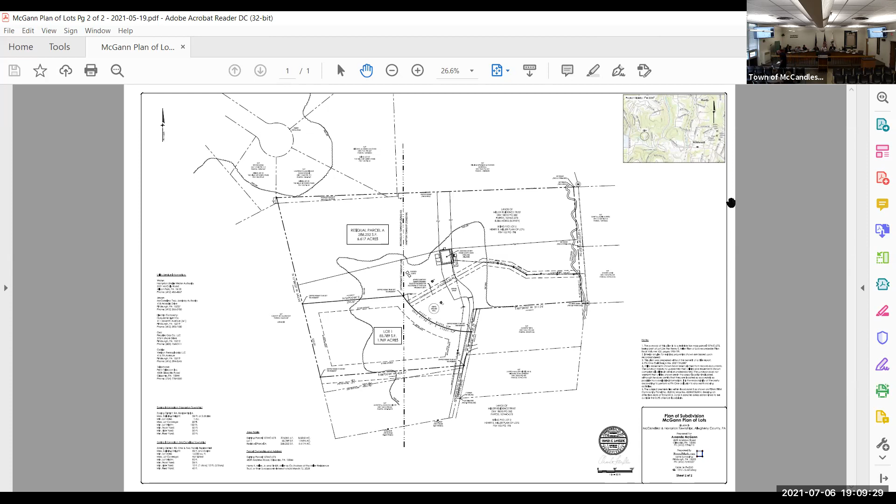All right. Give you a few seconds to get the next item up. And who do we have here? Do we have someone here for the Chesmer consolidation? Aha, there you are, sir. Come on up. The second item is a review and recommendation of the Chesmer consolidation plan. And I'll just give a pretty brief background here. I recall this is one of those bingo lot plans that we've seen before.

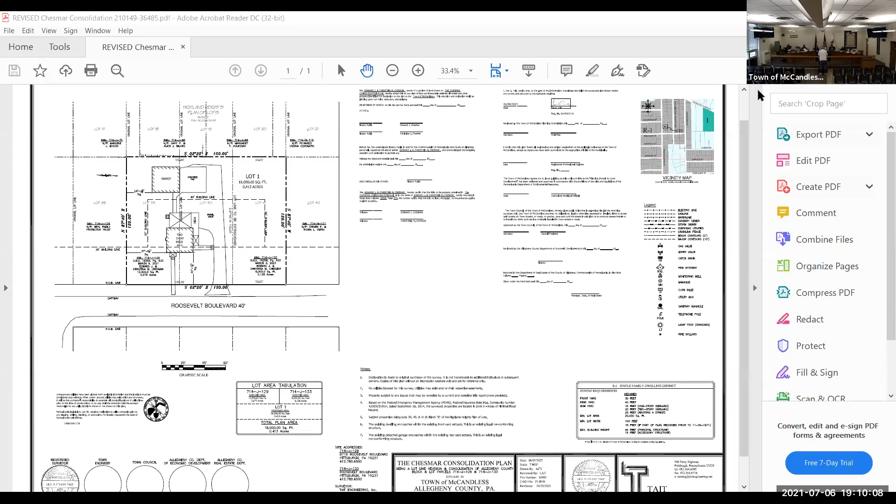Bingo lots. So from what I understand, the applicant came in, wanted to do something on his property that required a building and zoning permit, and discovered at that point his property is actually not one single property. We've seen these before; this is a plan requesting to consolidate all of the lots into one. I can confirm that the engineer's review letter has no further comments. Everything is code compliant at this point. If the applicant has anything else to add, you can do it now, sir.

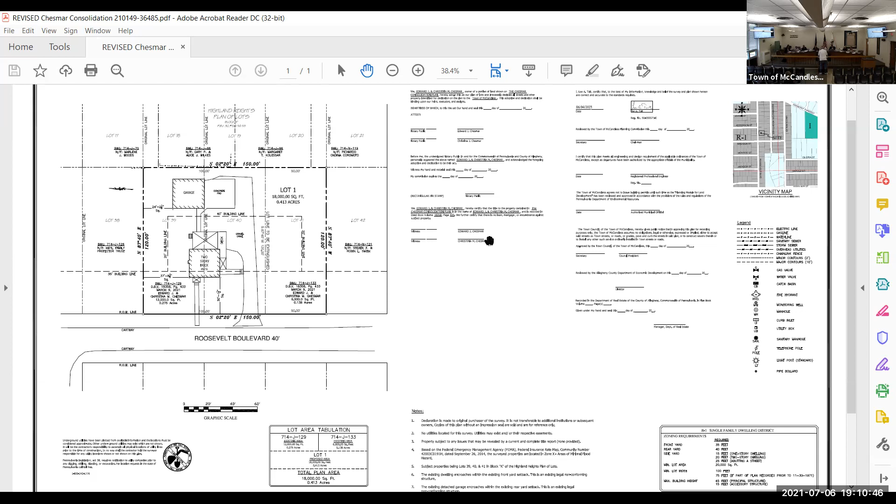No, this is uncharted waters for me, but I've learned a lot in a short period of time. I got the letter from Gateway, and I'm pleased with what I read here, I guess. Okay, you've owned all three lots right now? Yes, sir, I've owned them for a very long time. The one house we bought in 1981, and I bought the extra lot 9 years later. Okay.

Any comments? Greg? No, I don't have. Kim, anything on your end? No. Okay. All right, could I have a motion then to recommend approval? I'll motion to recommend the town council approve the lot consolidation application for the Chesmer consolidation plan. All in favor? Aye.

Okay, that's it. If I may ask, what's the next step? Yeah, so most likely you will be on the July 26th town council agenda. I believe we've already gotten the review letter back from the county, which is the last step before we put you on a town council agenda, and everything was okay on that front as well. So that will be the fourth Monday of the month. Meetings start at 7:30. Usually you come up towards the end of the agenda when it's a new agenda item. Okay. That's July 26th?

Yep. Oh, maybe that'll be lucky. That's my wife's birthday. Hey, that'll be a good birthday present for her. Good. Thank you for your time. Okay, thank you.

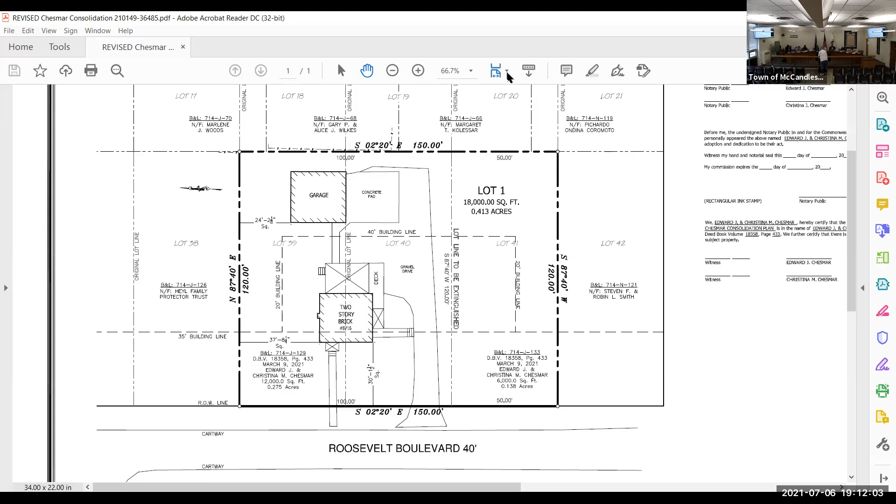All right. Next item on the agenda is 2020 Vision Holdings parking lot renovation, 8301 Perry Highway. I have a rendered plan. Would you like me to set it up for visual? Oh, you know what? Right now this AV system is all new. So I can pull it up if it was part of the latest submission. It was not. Okay. It would just be a hard copy. Yeah, let's do that for now, unless you can connect your computer to Wi-Fi.

So we have to make a motion to accept the application. Yeah, for those land development ones, we could do that, so that way it's on the clock. Okay, could we have a motion to accept the application for review? This is just while you guys are setting up. This is an administrative thing. This is something new, but it gets us on the clock. I move to accept the application for review. I'm not sure what that is.

So technically per our code, I think because that portion of the code was created before we had a planning person, to officially get land development applications on the clock for the state's required review period, we have to accept them formally at the planning commission. Is there a second? I'll second. All in favor? Aye. Okay. All right, now that that piece of administrative review is out of the way,

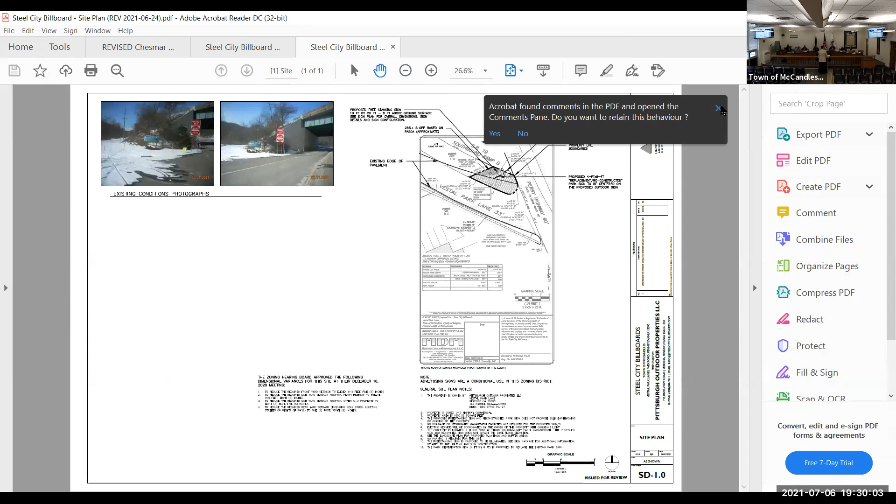And just while I am pulling this up for the Zoom, for some background, we have certainly discussed this plan before in general. This is the conditional use application that was discussed, I think, for a couple months prior. This is the land development side of that. So essentially, the conditional use is pending before town council. They had requested to bump the public hearing date for the conditional use back so that it could be considered in tandem with the land development application. This is that piece of this whole approval process.

As a refresher, it is a static billboard as I've been defining it, which essentially means it's not something that's electronic, it's not digital, the copy doesn't change. It's just whatever they put up at any given time. Specifically in our conditional use code, it does limit these types of billboards to being a static billboard, which is why that's been mentioned on the agendas and material related to it. I don't think I have anything to add since we've talked about this before. Just review with us how big this billboard is.

Sure. First of all, my name is Brian Almeida with the firm of Farringer McCarty Gray, representing the applicant, Pittsburgh Outdoor Properties LLC. They're also in the audience if you have any direct questions of them. Oh, you know what? I'm sorry, Brian. Before we move on, because this is the first time we've seen the land development portion of this application, we do want to do that administrative motion before we proceed. Could we have a motion to accept the application for review? Make a motion to accept the application for review. I'll second. All in favor? All right. Yes.

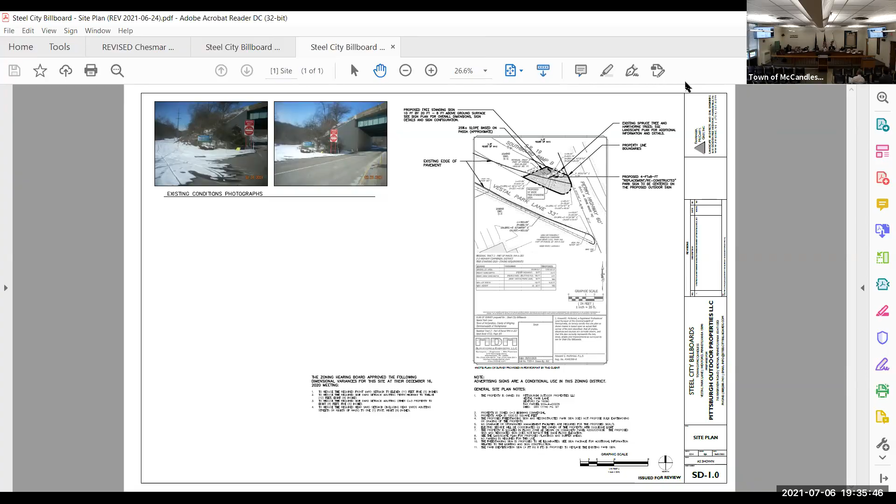The next item on the agenda is the McCandless Square Phase 2 retail. The first thing we have to do is have a motion to accept the application for review. Could we have that motion, please? I'll move to accept it for review. Is there a second? Second. All in favor? Aye. Okay. Who will be presenting this? All right. Jerry, I'm guessing that's you. We haven't actually met in person yet. It's been a while. All right, and I know we've got Kevin Doherty on the microphone here. We also have Todd Pfeiffer as well from MSRP LLC. Unless you want to be standing up, you can sit.

All right, so I sent Kevin a mic and camera request. Kevin, if you're not able to mute and unmute yourself, I'll fix that if that's a problem. But otherwise, just wave, I suppose, if you get muted and don't want to be. So Kevin is joining us from North Carolina, I think. One of the wonderful things of this hybrid format is we can have a couple different people here and a couple different people somewhere else.

So just as a quick introduction, I understand that this project predates me by a bit, at least the phase 1 and the concept plan of this development. But for those who aren't familiar with McCandless Square, it is, I believe, the former Trader Horn site, just a little bit down the road. Phase 1 was the Continental Senior Living Facility, which is nearing completion, I believe. Phase 2 is the retail portion, which is the northernmost portion of the property. This has survived so far, survived COVID. They're back at it and ready to present the latest that they've got. Did I get that right? That's it. Yep.

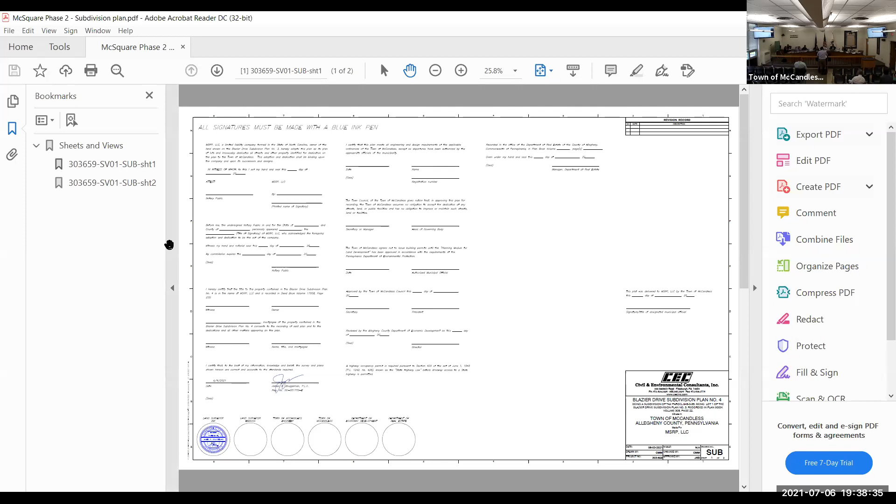Okay, what we want? That's it.

All right. So my name's Jerry Klodowski. I'm with Civil and Environmental Consultants. We are the consulting engineers for the project for MSRP LLC. The subdivision plan you see here, originally the site was about 24 acres. When Continental came through and did their subdivision plan, they consolidated the 3 lots that were there. We re-subdivided into 3 additional lots.

This subdivision actually takes lot 1 and subdivides it into 3 separate lots. The idea behind that is to keep a portion of it for the retail center, and then there's also going to be a sale for a daycare portion of it, and then potentially a future townhome portion, which is not part of the application. So that was the whole point of subdividing the property.

There were some comments on the Gateway letter regarding setbacks. The only setbacks we showed are along Blazier Drive and the exterior property lines. As part of the master plan approval, we are not required to provide setbacks on interior lot lines, so we do not show any setbacks on those lot lines. We do show that there was a sidewalk missing along Blazier Drive. That has been shown on the revised subdivision plan, so that'll appear when we resubmit it.

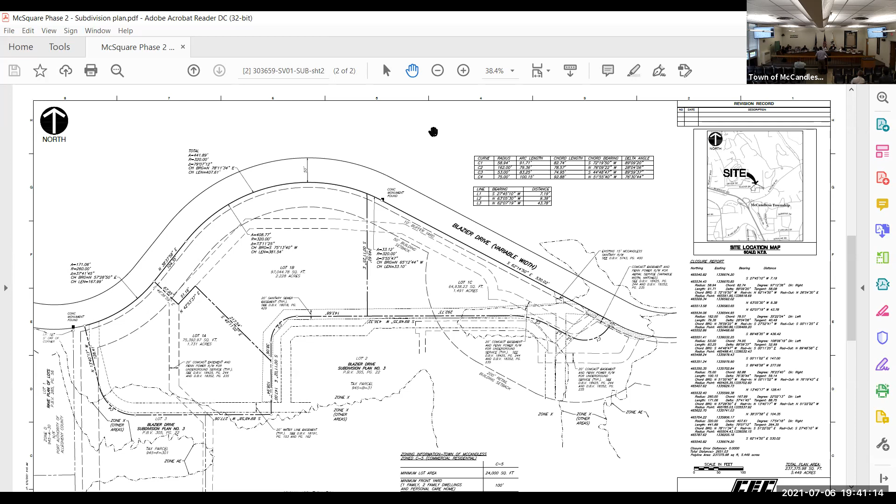That's a specific requirement of the stormwater ordinance, Jerry. That's why that was in there. So if it's covered in reciprocal easements, that'll be fine. Okay. Now we can go to the, I'm sorry. That's it for the subdivision, yeah. RJ? On the subdivision plan, no, I don't have any comments at this time. Everything's within Gateway's comment letter. Any comments by the planning commission members? Dan? No. John? Greg? No. Yep.

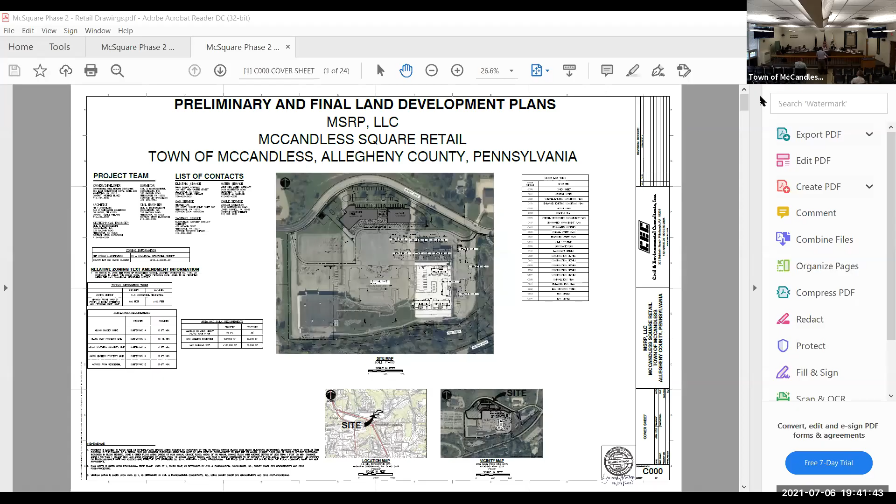Okay, all right. Now on to land development. There we go. All right, let's see here. I've got LD submission, which does not look like a large enough file. Aha, here we go. Retail drawings. All right, you just tell me what page you want us to be on. You can go to C200. C200. We want to see 300. There you go. Oh, this is what you wanted? Yeah, you can keep that one up for now.

Okay. So what I want to do is just go through what we're doing with the plan, what was done previously, what this project entails. And I think there's probably about 5 comments on the Gateway letter that are significant that we would like to address. A lot of the other ones are just some housekeeping items that we need to clean up in the letter.

So as RJ indicated, this project is a piece of a larger project that came through McCandless in 2019. The overall project is approximately 24 acres. And when we came in initially with the assisted living and the cottage homes, we developed a master plan that incorporated this retail portion of the project. So now that the assisted living and the cottage homes are underway, MSRP LLC decided it's time to move into this retail portion of it.

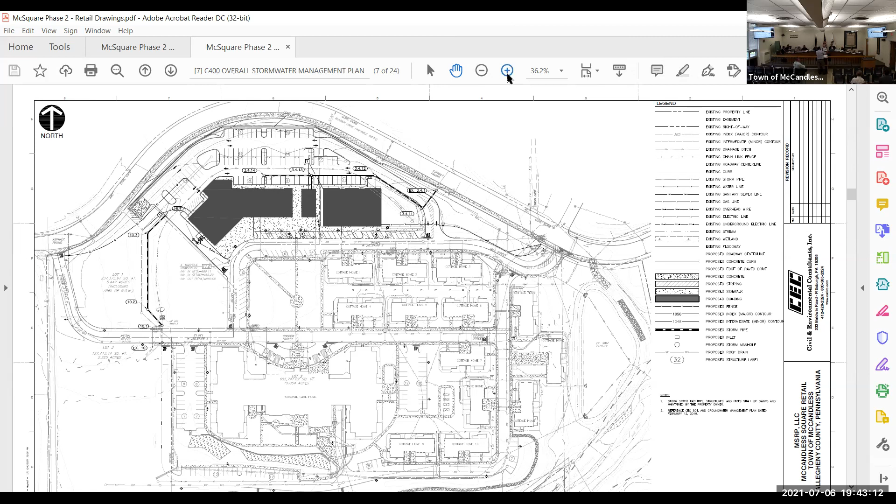So what we have is approximately 28,300 square feet of retail/commercial use. The building that is on the right-hand side is intended to be a 10,000 square foot daycare center. All of the daycare tenants will basically show up early in the morning, loop through the parking lot, drop off, and then leave the development. The parking for that can be handled by the parking along Mill Street in front of the buildings, and then the parking lot that we have behind the building itself.

The other larger L-shaped building is a 16,500 square foot retail and restaurant building. There's going to be a brew pub type establishment in there and other food amenities for the residents of this whole development. All of the utilities are existing. There's water lines out front along Mill Street that are going to connect up to these buildings. They've all been sized and developed to incorporate this into the project. Sanitary sewer is also out in Mill Street.

The only utilities that we're really adding is that run of storm sewer that runs along the back of the building to the right side, and then there's a run that goes through the left side. All of the stormwater was previously handled with the original development, and we submitted a letter that basically justifies that we have less impervious area than what we had originally planned. Therefore, the stormwater still is in compliance with the McCandless ordinance.

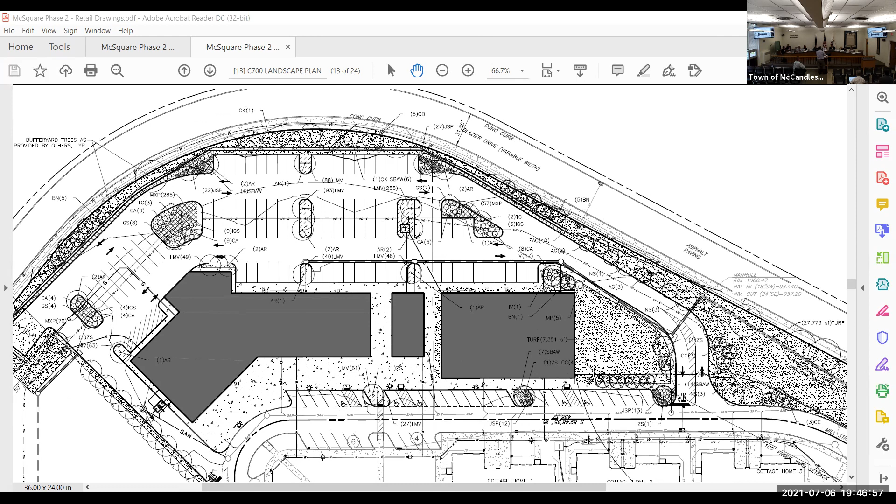If you don't mind, I'm just gonna pull up the rendering image because I think that illustrates it pretty well. Where's your dumpster? It's almost off the page there to the left. Oh, all the way to the top left? Yeah, side left. Right there, yeah.

I think my Adobe Acrobat is a little upset that I've tried to pull up so many large plans. Let me see, maybe the arch renderings one is the one that I want here. Aha, all right.

That gives you a better idea of what they would be doing with the patio area. And it sort of follows the same color scheme as the existing assisted living and cottage homes with the white siding. And then here's... Oh, you want to go back to that? Sure. That's the elevation that is facing the large building. Yes. Okay.

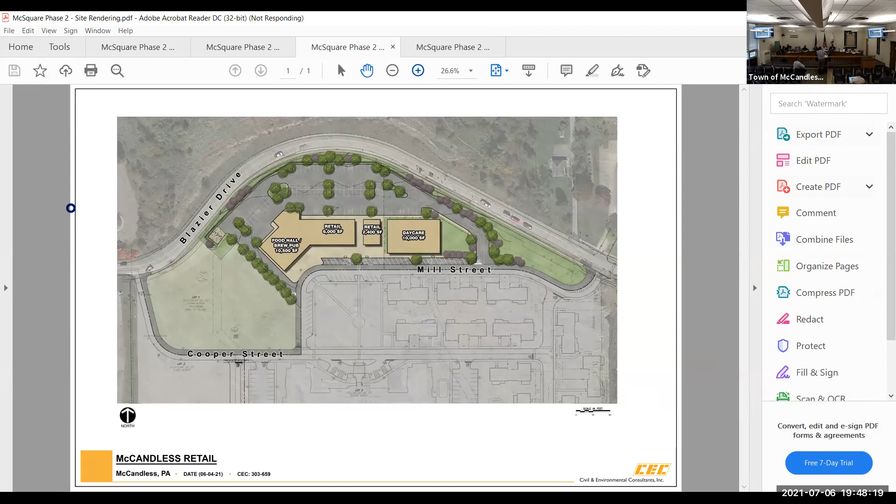Where will people be entering these retail from? They'll have double frontages, so they'll be able to enter from either side. Because I see parking on what I call the backside toward Blazier Drive. Right. And wouldn't that be the primary place people would enter from? Not necessarily. If folks from the assisted living or the cottages choose to visit this, chances are they're going to walk up through the front. Okay. But you're right, most people that are going to come in here to park will most likely park behind the building and enter that way.

But there are about 40 parking spaces that have been designated for this use along Mill Street there in the front. So for the assisted living and the cottage homes, there's ample parking elsewhere excluding these spaces. So these spaces can be used solely for this development.

Where's the main entrance for the daycare? Is that in off of Mill Street? We're not sure where it's going to be yet, but we believe it's going to be along the west face, right along that side.

And from what I understand, and Kevin, you can interrupt me, we believe that because of security protocols with the daycare, they will actually bring an employee outside to meet the child so that there's no additional clearances that parents would need to enter the facility. So a daycare worker will come out, pick up the child, take them back into the daycare. That's correct, Jerry. So it sort of alleviates the idea that somebody's going to be parking there long term or even short term for that matter. They're basically stopping, dropping off, and then going.

How many kids will be involved in the daycare? I believe it's 180 to 200, Ted. Okay.

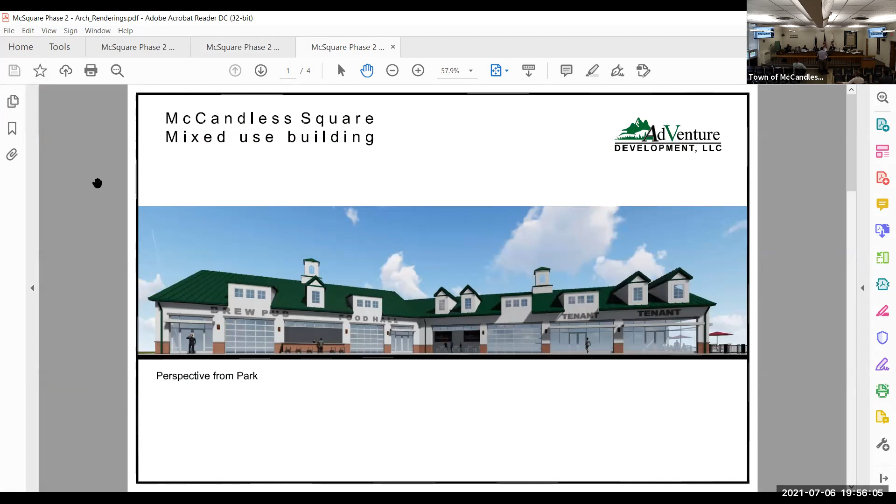I have a couple of questions, comments, I suppose. I'm concerned about the view or the elevation from Blazier. If I'm looking at the right south elevation, I think that's quite an attractive look. But people traveling on Blazier are going to get a less attractive look. They're going to see essentially the back of the building. It appears to me as the back of the building. Is there any way that can be improved?

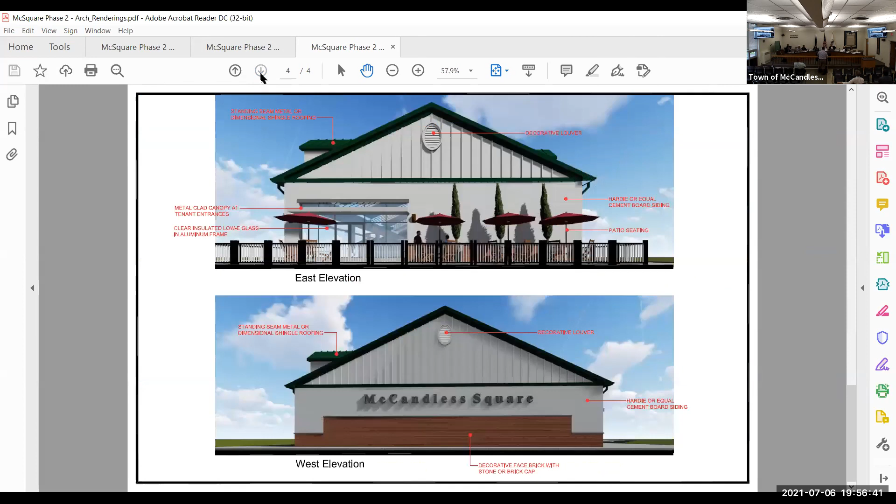I don't want to repeat what I call the McCandless Crossing blank wall look that you get going up and down McKnight. So is there some way aesthetically to improve the back of this, which is what everybody's going to see that travels along Blazier, so that they get a better view other than a large blank wall, trash receptacle, and, in my view, a much blanker, less attractive look.

Well, you're talking about dumpster enclosures and trash operations; it's difficult to make that look attractive in any setting. I will say that at McCandless Crossing, we did use similar dormers and tried to paint storm piping and utility lines in a color that blended into the walls, and tried, frankly, to hide some of it with some landscaping.

These are architectural renderings and don't reflect what landscaping there might be near the building that hopefully can send your eye towards that, versus light poles that might have our banners and things of that nature that would hopefully draw your attention as opposed to the service areas. Keep in mind, those doors that are shown there, they're glass doors. They're not just metal doors. I was looking at it quickly, and that's the feel I got too, that they were going to be metal doors, but they are going to be glass.

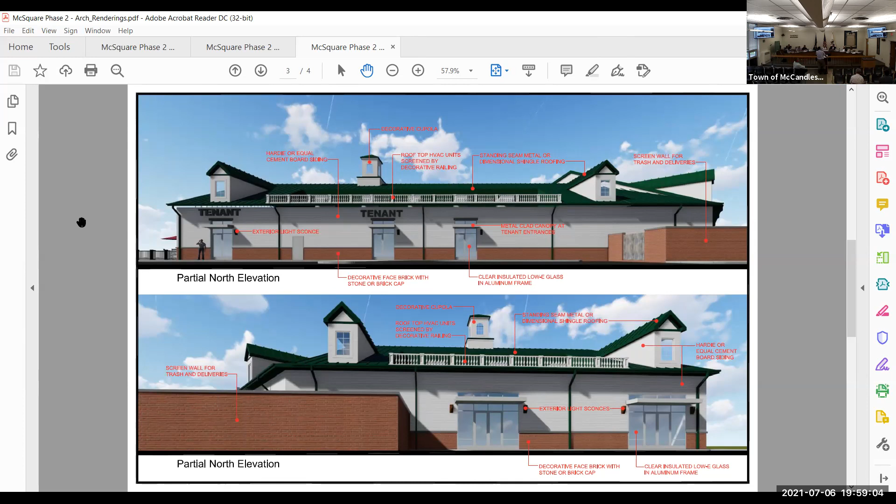RJ, the back one. Is that the one? Yeah, that's the front there. So you're referring to the triple window dormers as opposed to just the singles. More of it, and it breaks up the roof line significantly. Jerry, what's the height differential when you're traveling on Blazier Drive versus the finished floor elevation? Yeah, it's significant. It's 15 to 18 feet at the high point. So you're 15 to 18 feet higher on Blazier Drive than this building? Yes. Okay.

Yeah, I certainly understand what you're saying, but we also have to consider where the audience is, and playing to the town green, the center of activity, is something you've got to create synergy around. My hope is that you'll be seeing the roof line and up, but certainly we can look at some dormer additions beyond what's there. We'll certainly take that into account. Thank you. Sure. John?

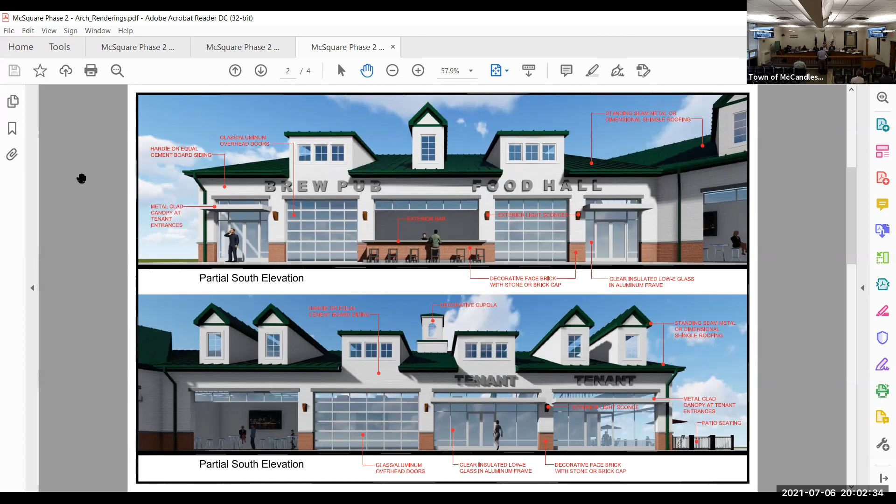Anything else from anybody? Greg? I do have one more. You have a couple. And I'm not sure how this was resolved, RJ, because you and I had some conversation in the last few days. This has to deal with when we were first looking at this property, we had proposed and had given agreement to a path between the large residential building, the 3-story building, and the creek. This was going to be a path for the public to use and part of the overall trail system in and around McCandless that we had proposed in our comprehensive plan. Is that still being planned, and what is the status of it?

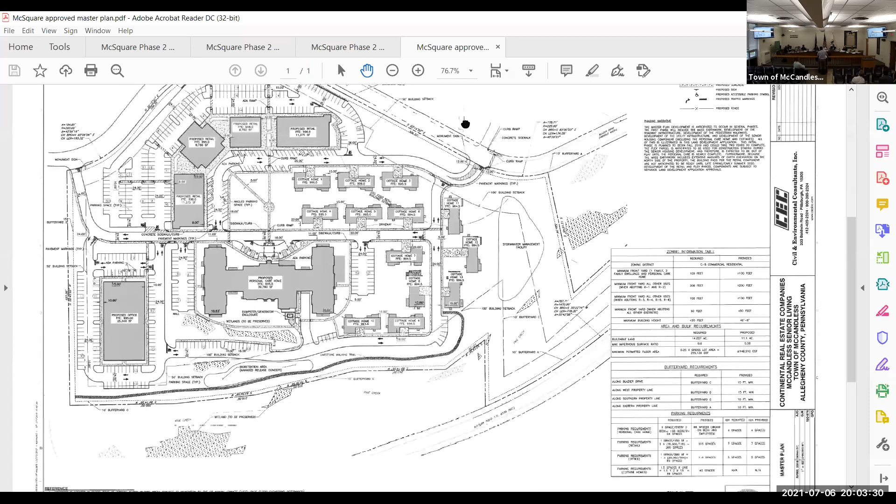While we're talking, I'm just going to bring up the approved plan that you and I were taking a look at. Yeah, the trail's going to be constructed as part of the senior living development. Right. And that trail will extend, as you can see it there, from the far west property line. We stopped it where we did, not at the property line, because there is a grade differential there. But it will extend up to the last cottage home and then tie into the sidewalk system that goes out to Blazier Drive. Okay, and at the time, we didn't know what was going to be developed over to the right-hand side of this depiction.

And so, as I remember it, that's the reason we put that J curl on the path, to bring it back to the sidewalk so that whoever was on the path could then walk up to Blazier Drive along the sidewalk. Mm-hmm. Now, I'm mixing and matching here with the Pascal House. When Pascal House wanted to build their property there, doesn't that tie into the Pascal House property? And when we talked to Pascal House, why wouldn't we continue that path now across Pascal House up to Blazier Drive instead of doing that little J curl and terminating it?

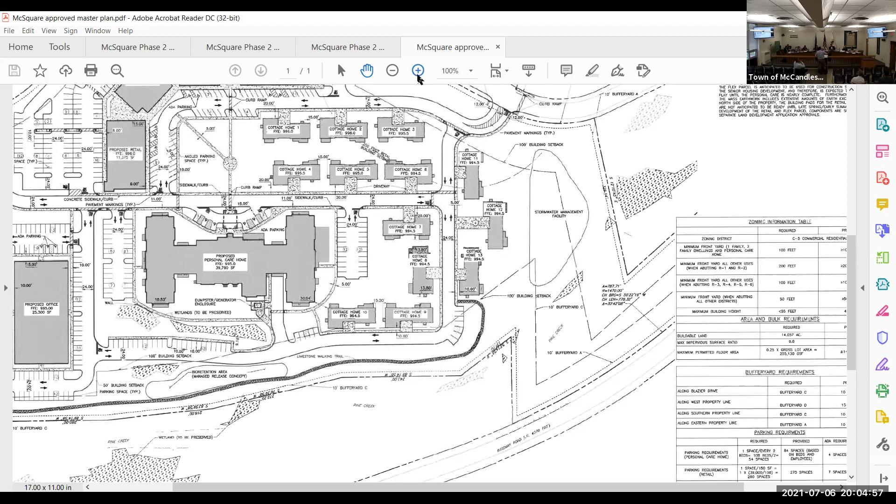Well, the reason we curled it like that is because the original plan was, as you indicated, to follow around the stormwater pond on the embankment and then eventually up to Blazier Drive. The issue is there's a floodplain and a floodway associated with Pine Creek. Right. And the breastwork of our dam encroaches in that floodway. So the discussions we had with DEP and the Conservation District was, if you're going to put a trail on there and improve that surface, then we would have to come in for a 105/404 permit to permit that section of the path that occurs within the floodway.

And at the time, we all agreed it doesn't make sense to wait on a permit for 1.5 years to get that to happen. It makes more sense to just keep it up into the development and continue it on. And the discussions that we had back then with Bruce were that, with this whole project, what we wanted to do was bring people that are walking down this trail, walking down Blazier on their way to North Park. We want all of those residents to come into the development. We want them to use the town green. We want them to use these retail developments. So we want them to come into the park.

I don't know if you remember the discussion about the sidewalk along Blazier Drive, because we originally didn't have a sidewalk along Blazier Drive, because the idea was we wanted to bring people into our development so that they could use those amenities that we're putting in.

Similar with the trail, we wanted to do the same thing. In fact, I think we even talked about making the sidewalk that this path terminates into even a bigger sidewalk than a standard sidewalk, so that it could accommodate more people. I don't know whatever came of that, but that made sense. If you've got people who are either riding bicycles or walking dogs or whatever on the path, if they are then funneled down to a 4-foot wide sidewalk, I thought I remembered the discussion being that might be problematic.

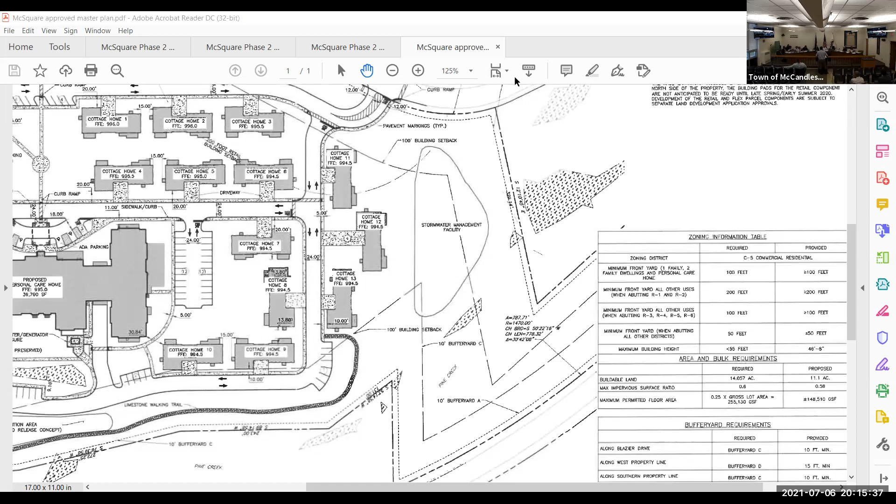So one of the comments on Gateway's letter was relative to the retaining wall that we showed along Blazier Drive. The wall varied from, I think, 6 or 7 feet up to a maximum of 12 feet, where Blazier Drive peaks in elevation and then comes back down again to another 7-foot wall. The grading ordinance requires that there be a buffer in front of the wall that's 2 times the height of the wall, which basically would encroach upon our parking area.

So we stepped back and said, okay, what can we do to fix this issue? What we did is we just ran some 2-to-1 grading from the property line area down to the parking lot to see how it would impact our parking. With the original plan, we had 147 parking spaces.

With this plan, we have 141 parking spaces. So in general, the parking does not conform to the ordinance requirements. However, Kevin is actually having a traffic engineer prepare a parking study that would justify the amount of parking that we have. The parking based on the square footages leads us to almost 5 spaces per 1,000, which is typical for a retail development. So we think that there's ample parking for this use.

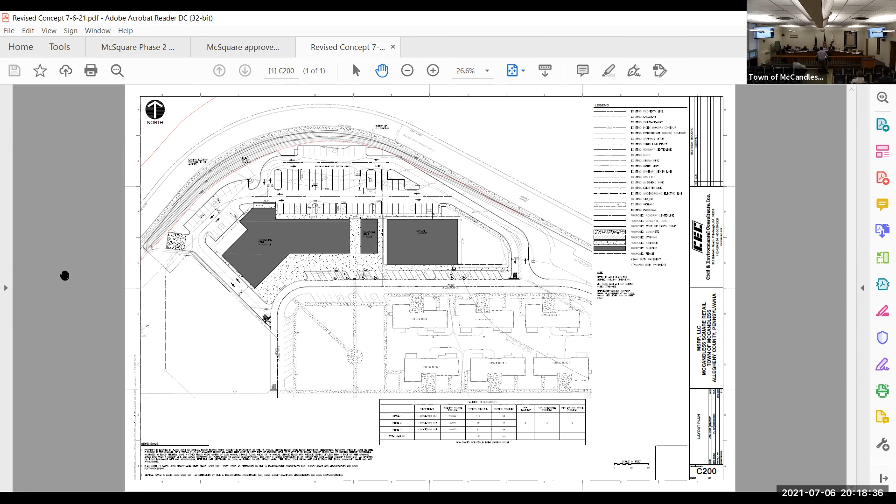Now, of course, it would behoove a developer to make sure that whatever they want to do, they have enough parking to meet the ordinance at that point. But tenants change, uses change, things like that. A large portion of the square footage would essentially just be dependent on the demand study for the restaurant portion. I'd have to take a look exactly at how the daycare use might change, but that would fall under the typical retail. Yeah, I think the daycare only requires like 11 spaces or 14 spaces. Yeah, it's probably quite a low number since most of the patrons will not be driving, I hope.

So with the particular uses that they're proposing here, although those aren't necessarily something that have to be tied to the land development, because that's more of an administrative occupancy permit issue, we want to take a look at it, but I think there's a little bit of wiggle room to make sure that we don't ultimately end up creating more pavement than we need to, right on this waterway here.

I can comment on our theoretical analysis. RJ's right. At the end of the day, we have a lot of experience from McCandless Crossing that translates to what we've done here, and really to make sure that the uses are complementary. And at the same time, we also know there's 400 spaces immediately abutting us to our west, that the Port Authority is currently committed to redoing. And obviously, the rest of the old Showcase is hopefully going to see new development.

Currently it's a sea of parking, and I would suspect when that gets developed that there will be some of that. So we felt like we needed to make sure we had enough for our own development and to be complementary to the senior living and ultimately the townhomes. So it was not without a lot of discussion and thought. And I believe, Jerry, we came out at like 4.98 spaces per 1,000, but with the variance in timing on the uses,

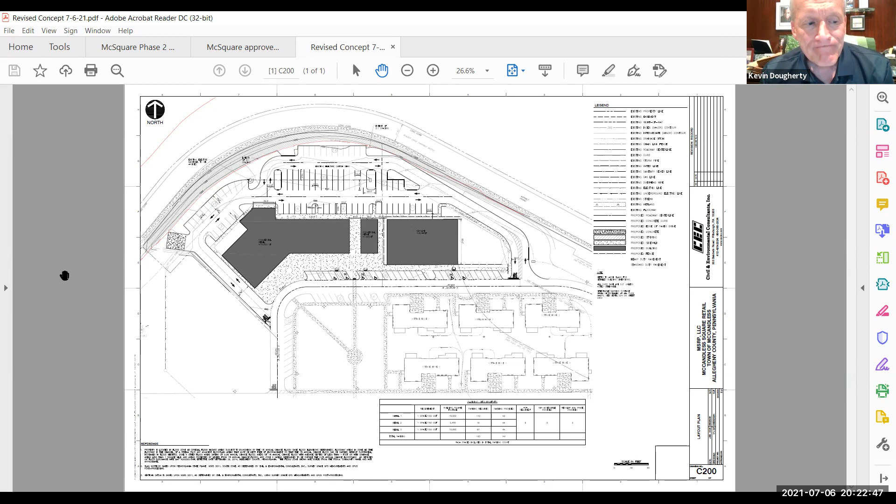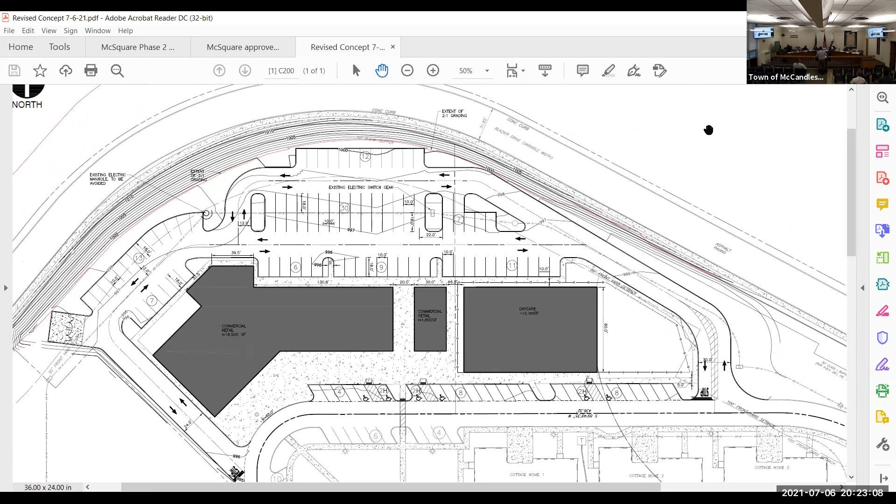And the only other item, the comment about the separation of the buildings, that 1,800 square foot building in the middle of the two larger buildings. I think what we're going to do is we're just going to consolidate it into the commercial building on the left-hand side so that we have ample separation between the daycare and the retail building. And that'll show up on the revised plans. That'll give a little bit more of an opportunity to sort of add a little courtyard fluff. Yeah. There. Yeah.

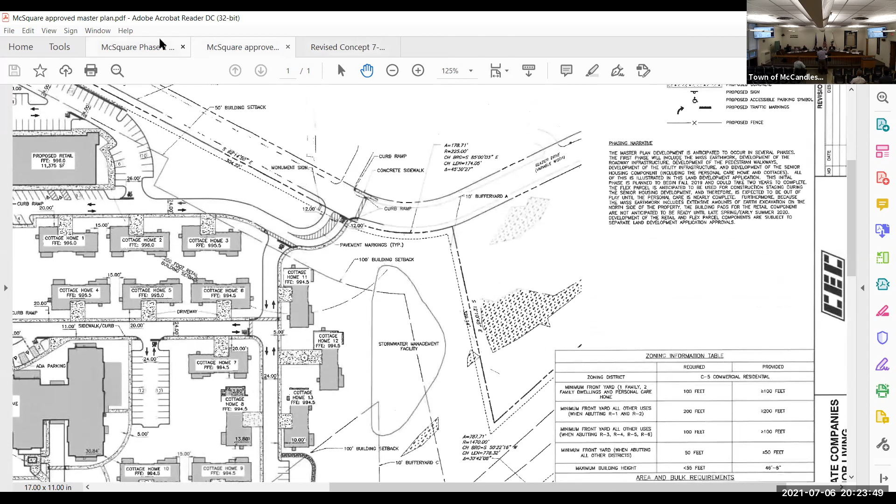Jerry, you bringing people down, like Kim was talking about, people that might be using McKnight Road. Are you bringing people into the development further to the east? Is there a way to get in this way? Yeah, there's a sidewalk, and of course, we closed the plan, but there's a sidewalk in front of the funeral home there. Okay. And we're putting a crossing over to our side and then into the development. Okay, so that spur line comes over.

Okay. Then will you be able to come down the drive and in on the short side here, closest to the east? You know what I'm talking about? Instead of people, they're not going to go up all the way around. And there's a sidewalk. There's one here. Okay. I think there's a sidewalk on the whole frontage, isn't there? Yes. Everybody wants to walk the shortest distance though, right? That's right. Get in more quickly. We'll know real quick where we need to add sidewalks. Yeah.

Are you thinking that there needs to be steps from the sidewalk? No, I think he's got it handled. If I'm coming from McCandless Drive, there's kind of a shortcut into the retail, right, you would come down along the drive. Right. And I thought you were talking about the other end. I'm not sure on the other end. That's what I thought maybe.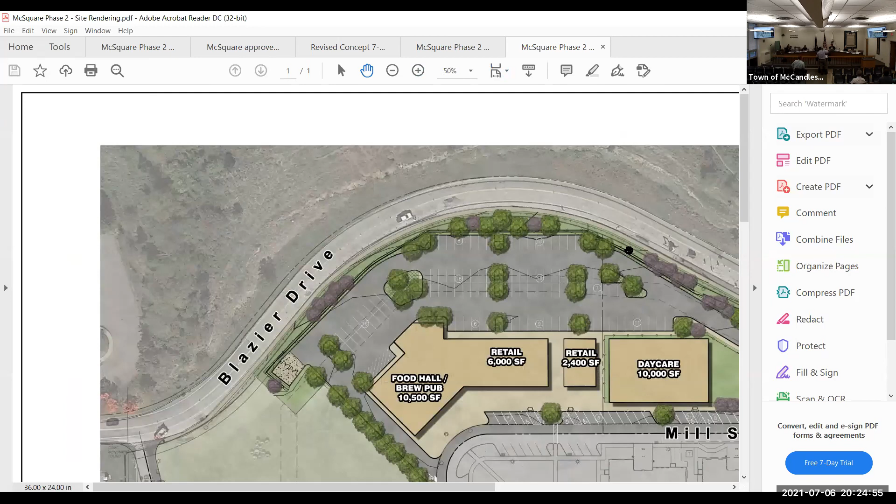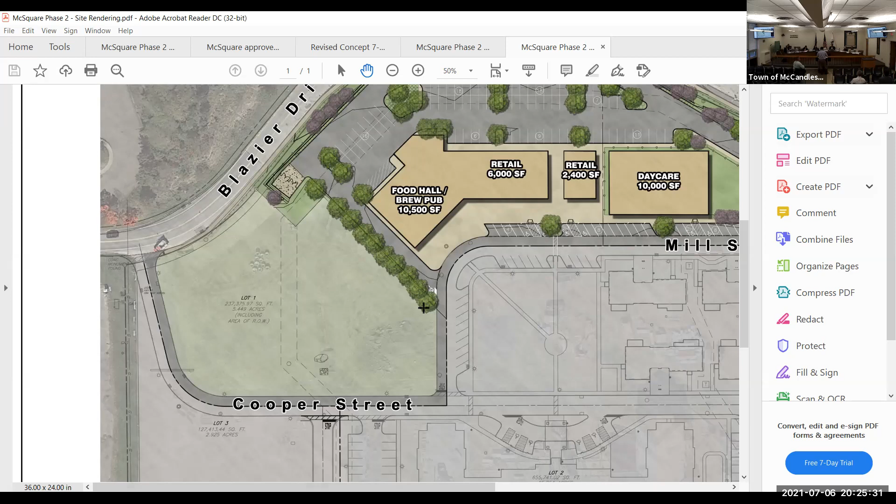Same thing. There's a sidewalk closest to the Port Authority side that wraps down along Cooper Street. So there's the sidewalk all the way along Blazier, and then on the left-hand side here on our entrance driveway, there's a sidewalk that follows that, if you put your cursor down on the left-hand side of that roadway, right there. So it follows Cooper Street on the left-hand side all the way down and around into the town green. And then when that other parcel develops, I'm sure there'll be sidewalks on that side as well. Any other comments?

If the commissioners don't have any immediate questions, maybe I'll turn it over to Mr. Dizeroff in case he has anything he specifically wants to call out. No, I think for this review letter, Jerry identified the major issues in his revised plan. My main issues were the parking and the walls. Other than that, there's some minor cleanup items, and the typical things that we have at the end.

I didn't have this slated for a motion tonight, just because I thought, especially with the gravity of this development, that it would be good to have those cleanup items addressed before it gets out of the planning commission. But if there's any other feedback that we want to take back into the review process, now would be the time. Did we vote on the subdivision plan? No, they just did the motion to accept the whole application for review. Probably want to do this part and parcel, do them together no matter what. If you do it tonight, you do them together. Yeah, it would be cleaner to keep them together.

Okay, I guess that's it then, right? Yeah, I guess so. All right, we will take a look whenever you have the revisions in. We usually ask 2 full weeks before the next planning commission meeting that you're gonna appear on. Okay. And then we'll get you a comment letter back before that. Okay, sounds good. Thank you.

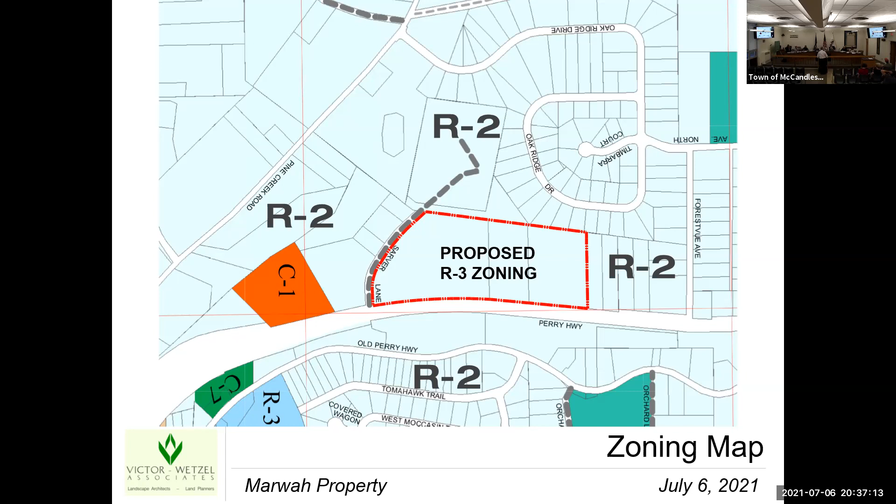You can see the surrounding property and the existing property is R2. New slide. However, when we look at land uses around us, you'll see that it's really a mix of uses, even though it's all zoned R2. To the north and northwest of us, we have the existing single family. To the south of us is Sarver Lane, which is a private street with a couple of larger single family lots. To the due south of us is a Duquesne Light substation.

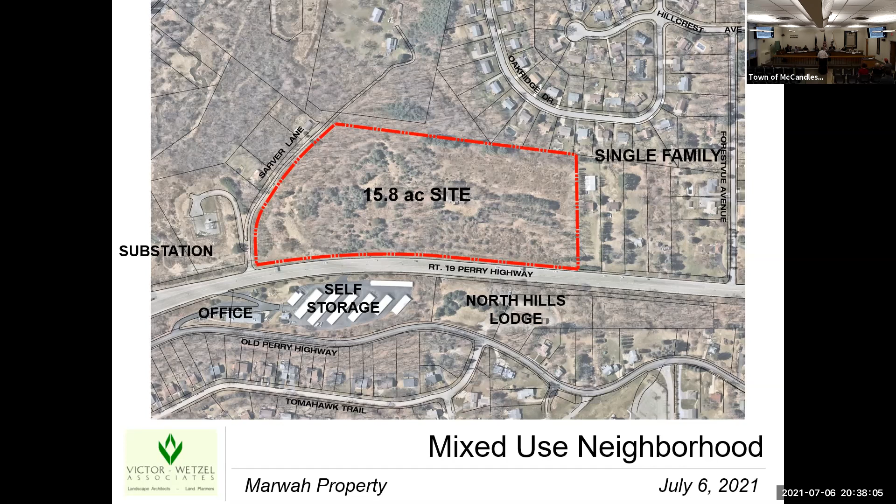To the east of us on the other side of Perry Highway, even though it is zoned R2 single family, you have office, some self-storage facilities, and then the North Hills Lodge fraternal organization. So you have a variety of uses that fall not within the traditional R2. Next slide. So I would refer to it as a mixed use.

The topography of the site is such that along Perry Highway, from our northerly corner going to the south, the grade is falling significantly. There's, I believe, 40 or 50 some feet of elevation change across our 2,000 feet of frontage. The point of access is pretty much limited because the only street frontage for a public street we have is along Perry Highway. Again, Sarver Lane to our south is a private street and we don't have rights to that private street. And topographically, it would not be physically possible to really construct there. Next slide.

Access to the site is really a major driving force and why this property has never developed, in that there is a Jersey median barrier down the middle of Perry Highway, which would restrict traffic to a right in, right out access point. And so what we've done is at that northeasterly corner, create a right in, right out access that would come up and loop in an enlarged cul-de-sac type street with a series of courts coming off of it. Next slide.

The proposed housing would be a townhouse. We were using the Ryan Homes Wexford townhouse, which is a very traditional townhouse, meaning it's a 3-level, 2-car garage on the lowest level with the entrance. On the mid-level would be the living room, dining room, kitchen. And on the upper level would be the 3 bedrooms. So again, very traditional, what we refer to as an up and down type townhouse. Next slide.

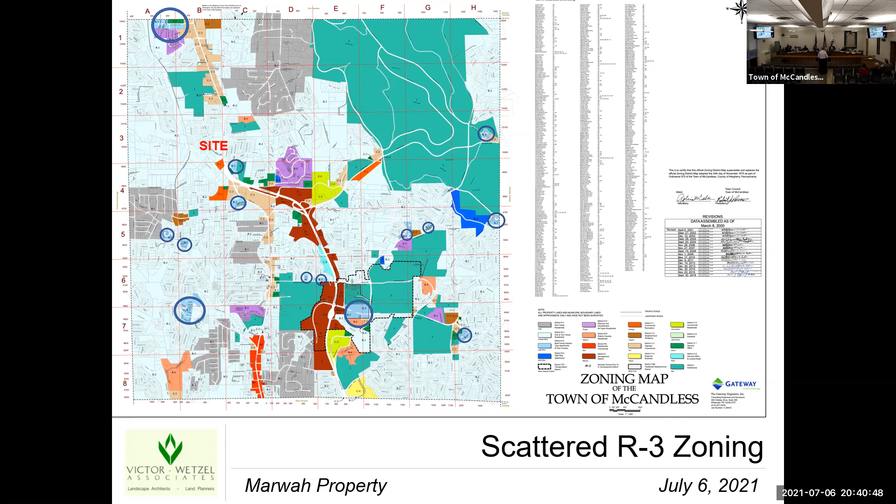And the conclusions you heard me say last month, but again, for the purpose of the audience who is not here: we believe the rezoning is appropriate because this is a neighborhood of mixed uses, and the property's only access is from Route 19. So if there's any increased traffic, it's all put back onto a major collector road. The Route 19 corridor, as you go up and down through McCandless, is an area of higher intensity, whether it be commercial or multifamily, or the D zoning districts. It is where you have concentrated your higher intensity uses.

And McCandless has traditionally scattered its R3 townhouse type developments, usually in and adjacent to R2. So again, it's not unusual to find this by past practices in McCandless. And lastly, McCandless has a certain standard for setbacks between single family and multifamily, that if rezoned to R3, then the standard side and rear yard setbacks would be replaced by a 100-foot buffer around all sides of the property between the single family and multifamily.

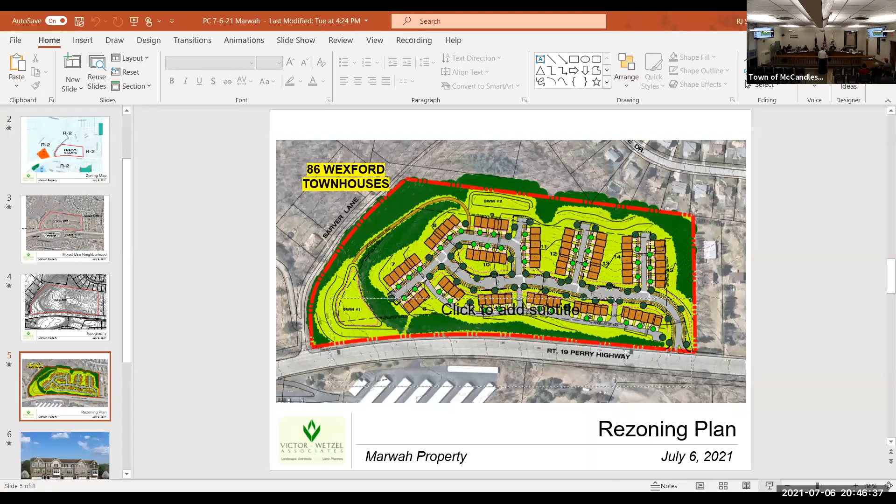PennDOT shies away from acceleration lanes. They look more at decel lanes when people are trying to slow down and turn into a development, or a turning lane, of course. Put the plan back. That's better too, but they're all from a stop position. And again, that's PennDOT. PennDOT's gonna have to look at it. So this is just for rezoning at this point? Yeah, that's correct. So as we get into the planning of it, we would look at that intersection in more detail. Is that correct? We would look at that, stormwater, sidewalk circulation, all the site plan issues.

There is no formal site plan approval process given through the rezoning process. Yeah, and that includes looking at all the zoning aspects. I think in the previous discussion, they had mentioned that they would request, for example, a reduction in setback to Perry Highway, because it's pretty deep given the fact that R2 is on the other side of the street. However, neither of those uses are actual single-family home uses. So those are some of the things that have come up in this conceptual discussion, but none of that constitutes an actual approval of any of those aspects. That would have to go through the land development process.

So you may have answered my question, because the concept plan is for 86 units of townhomes. And I believe on page 3 of the draft minutes for the June 1st meeting, RJ estimated the total acreage that could support 86 units. RJ was interested in seeing how pulling out the steep slopes or drive aisles might affect the density calculation. Yeah, so thinking back to that, the site is a little over 15 acres. Mr. Victor, what is it? 15.8. Close enough. Okay, so almost 16.

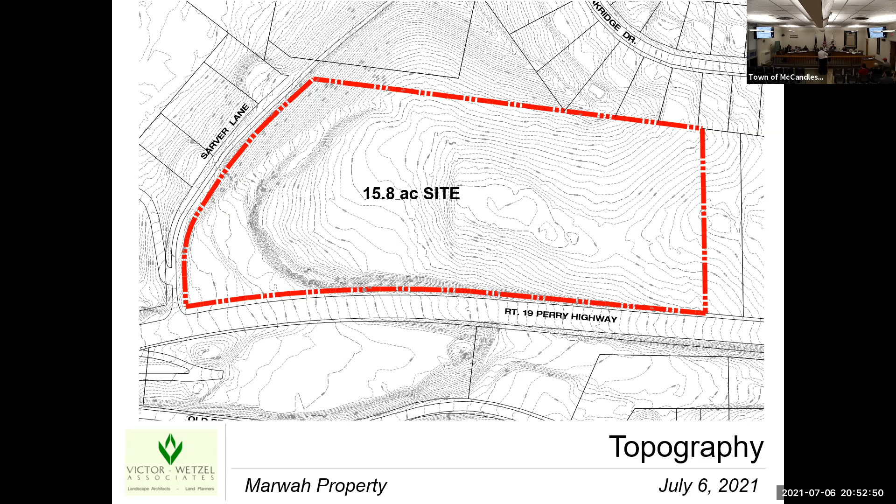Our stormwater detention facilities are located in such a way that we're going to pick up the drainage from the first 2 courts and take that water over to our detention facilities. So all of our water is being controlled, and by your ordinance, the water that comes off of a controlled site will be less than what it is today. So fears that we are going to flood the houses on Oak Ridge Drive are unfounded, because topographically our water can't get to those houses. Can it get to the ravine? Yes. Will it get to the ravine once developed at a lesser rate? Yes, because your ordinance requires us to do so.

Well, as a follow-up, there are homes below Sarver Lane, approximately 4 homes. Could they be affected by stormwater?

Again, our discharge from our stormwater detention facility will gather all of the water that currently today flows south onto Sarver Lane. And we have a driveway that comes down, so it acts almost like an interceptor as well, and brings it all to stormwater management number 1. That's in the lower left corner as you're looking at it, thank you. And the discharge for that is a pipe that goes underneath Route 19.

So, no, we're quite comfortable. We are not going to have issues with stormwater, and we will prove that at the time of land development. But this is just for the rezoning. We have to go through all this again. Right, these are great questions, but we're just very confident to tell you there are not problems created by stormwater for this.

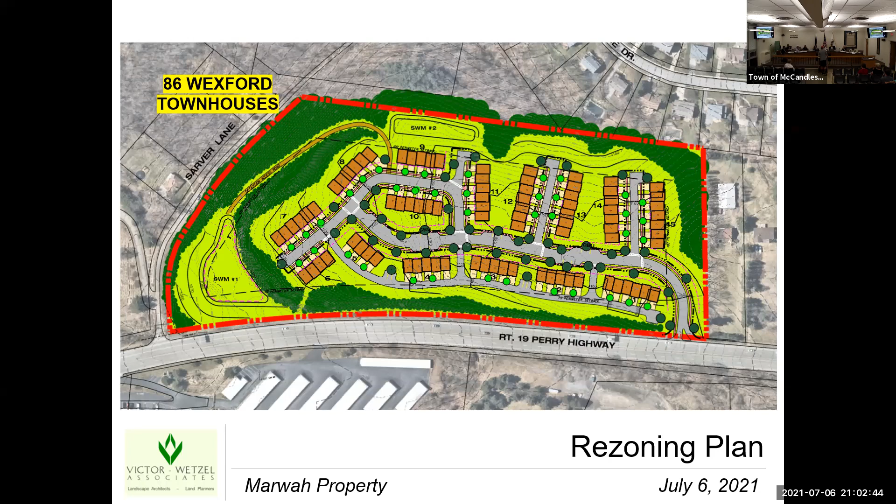And that's really why, like I said, the whole neighborhood got involved last time, because even if you lived lower in the neighborhood and weren't directly abutting, you were going to be impacted by that traffic situation. Okay. Anything else? No. Thank you for your time. Thank you very much. Anyone else? Okay.

If the planning commission wants to tender a recommendation on this before the public hearing, it has to be tonight. Okay. You have anything else to say, Steve? I would say that we have likewise looked, and there are alternative ways by which to disperse the traffic. But also, I think the impression is that all traffic will come from the south trying to get into the development, and that's not true.

People's traffic patterns, some people go to the shopping center to the north. And there's a lot of businesses, people work to the north. So there's a certain percentage of the traffic that will not come through Oak Ridge, no matter how desirable it may be presumed to be, because they're coming from the north or heading back to the north. And if they're going back to the north, they would just go south, go to the traffic light, make a couple lefts down near the drugstore, and throw themselves back on 19.

Okay. All right. Does anyone want to make a motion to recommend town council approve the Marwah property rezoning application to change the zoning district to R3 from R2 for the purpose of constructing townhomes?

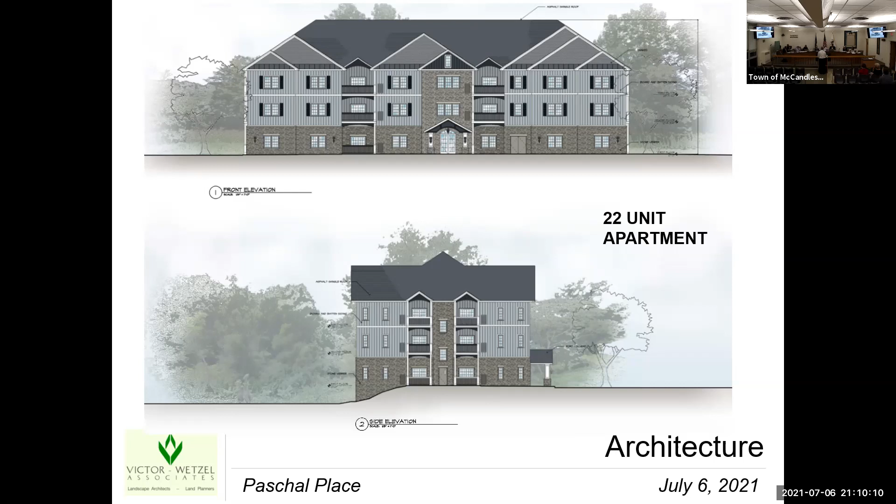So on the side view that you see on the lower elevation there, you'll see the doorway on the lower level. This is a 3-story building in which the living level is first, second, and third. There is no basement on this site, and the reason for that is because of the proximity to Pine Creek and the floodplain. Next slide.

This shows the existing conditions. This is a drawing you've seen previously. Again, Blazier Drive is along our frontage that we do not own all the way to Ingomar Road, and along our property, the southern side would be Pine Creek, the Pine Creek floodway, and then adjacent to that would be the Pine Creek flood plain. That's the yellow colored area. And you can see the small little island area there closer to Blazier Drive where we are finally above the flood plain. Next slide.

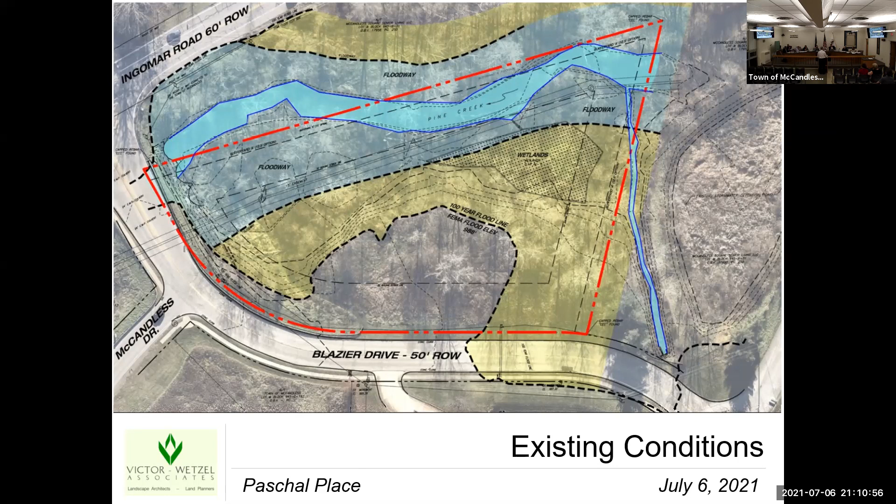Our proposal is to build a single apartment building. We have, at your direction from the last meeting, relocated the entrance and exit drive on our left here. That's the eastern one, so that it is midpoint between McCandless Drive and the funeral home driveway, which is located right below the word drive on Blazier Drive. So our driveway now is midpoint between those two, which was requested. Reducing our building size slightly reduced our parking, so it allowed us to shrink down and easily move that over to meet that suggestion. Next slide.

Again, I've superimposed the outline of our building to the flood plain, and you can see where we are encroaching ever so slightly into the flood plain area. We are allowed to build into the floodplain as long as we do not raise the elevation of the FEMA by our intrusion into it. And the intrusion is so minor. Our engineer just finished this afternoon the hydraulics on that, and we'll be able to provide that to Dan to verify that.

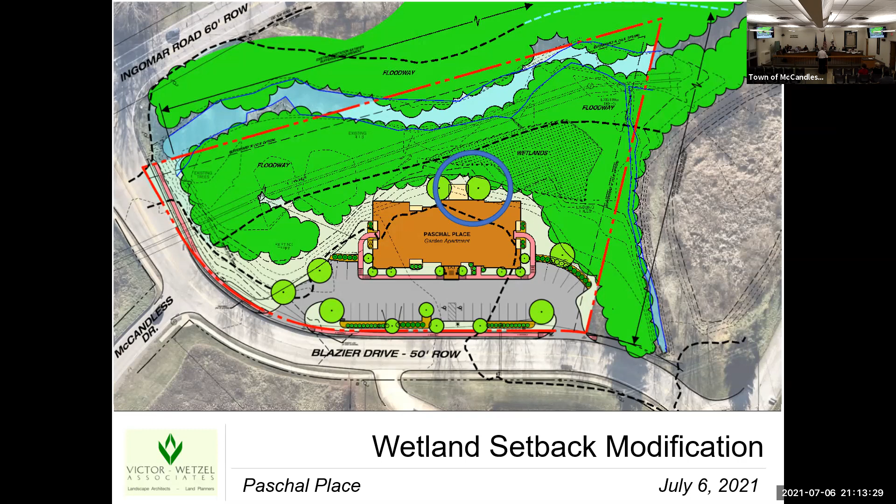The most recent review letter brought forth an item that we were unaware of, and quite honestly, you may not be aware of either. I want to make sure I say this right: a Streets, Utilities, and Public Services Code, Section 913 of your ordinance. It's not in the SALDO, it's not in the zoning, it's in this Public Service Code, and it says we must maintain a 25-foot setback / buffer from wetlands. And so if we can, next slide, in that portion of this area,

at the back of our building, we have a deck that is sticking out approximately 16 feet. From the tip of that deck to our wetlands is 19 feet. So we have a deck that encroaches 6 feet into the 25-foot setback. Is this an elevated deck? It is an elevated deck. Okay. It sits about 5 feet above it. So the actual intrusion into the wetlands buffer, we're not even into the wetlands, but we have a wetland buffer of 25 feet. Our only intrusion is we're going to build 2 posts into the ground to hold up a deck that'll float over the buffer zone. So we think that is reasonable to ask.

If the modification is not granted, then the deck would simply be reduced in size. We would like this to be allowed because this deck comes off the community room that we have on the first floor for the residents. And so it becomes an outdoor social space for them. And it is the south side of the building, so it gets a lot of solar, et cetera. It's an ideal location for it. And we think using the deck has the least amount of intrusion to the woods and the wetlands that we have back there. So we were hoping that you will grant the modification.

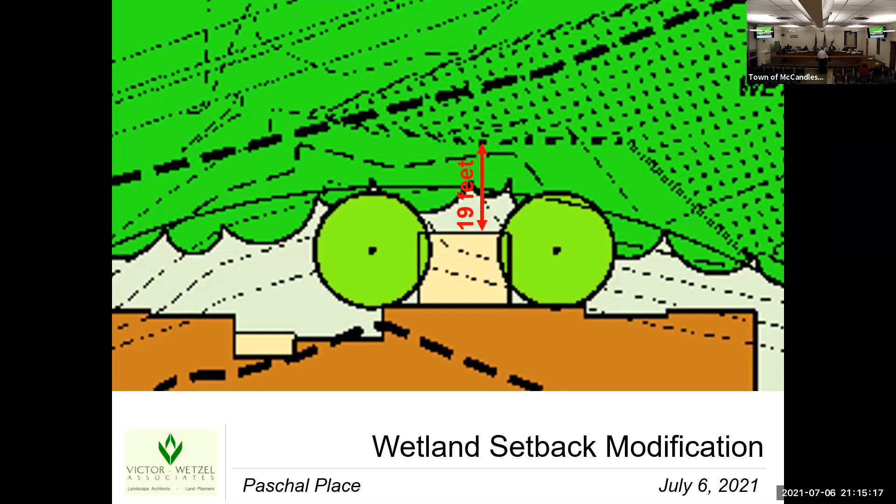But the site plan does not stand or fall on just the need for this. Next. Again, brings us back to just the site plan. I think the last engineer's review letter had a lot of little points, check the boxes and add a few notes here and there type stuff, but nothing dramatic, unless Dan wants to correct me on that statement. And we're looking for you to make a recommendation so we can go forward.

Dan, do you have anything to say? Steve, as usual, does a great presentation. But my only concern is, it is pretty important that we see that data that the project is not affecting the floodplain. While I trust he has accurate information, I've not seen that yet. That's probably my most significant comment. Other than that, as Steve said, there's a lot of minor cleanup issues that I think we can work through before town council. That's my comments.

Yeah, I know we have it. It took us a while to get the flood information from the Corps of Engineers when you deal with doing a FEMA request. And so that's why we're a little tardy in getting it, but we did get it last week and we've run the calcs. So we're comfortable we will be able to satisfy the engineer's requirements for that.

Yes. Would it be possible, decks are just outside spaces important for everyone, and that would be a lovely place to look out from. I totally support that. Would it be possible, instead of having the deck square coming off the back, to have a little walkway that went to the side and then the deck, because you got lots of space on that other side there? The problem is that if you project left and right, and it's funny you raise that question because it was given to me just today. Why don't we just spread it out?

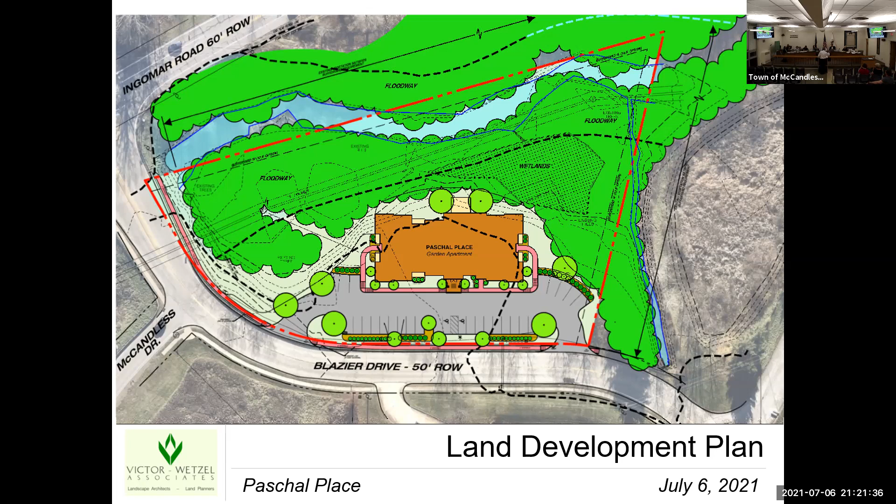RJ, could you back up to, I think it's the topographic map, but it may not be able to. Let's see what we got here. That one's fine. Oh, this one? All right. That one's fine. Trying to. It shows me that the 100-year flood breaches Blazier Drive. So before it comes to our apartment, it's going to breach Blazier Drive. So that's what those little heavy lines are showing me.

That's all. Jonathan? The deck's the only place that doesn't meet the 25-foot setback, right? Because that's all I had for now. Greg? No. Kim? No, I was trying to look up Ivan. I can't get, I think that'd be tough to translate into this particular plan. Yeah, that'd be a pretty specific Google search.

So I had just a potential action agenda item on there because I wasn't sure how you all would feel about the floodplain stuff. If the commission does choose to take action on this, I certainly don't want to hold up anything that's ready to move forward. I know that this is a sensitive area and definitely something that we want to look at closely, anything that's close to Pine Creek for certain.

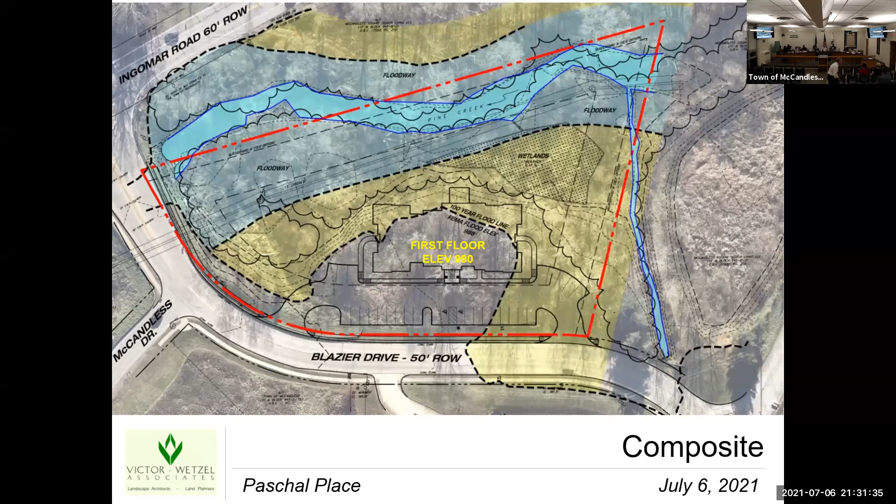Okay, item 8 is approval of the June 1st, 2021 meeting minutes. Has everybody read them? I have. Good. Would you like to make a motion to approve them? I'll move to approve the minutes. Second. All in favor? Aye.

Are there any other general public comments? We have a general public comment period right now. Is anybody interested in signing up for that? Okay. Hearing none. All right. Could I have a motion to adjourn? Make a motion to adjourn. Second. All in favor? Aye. Okay.